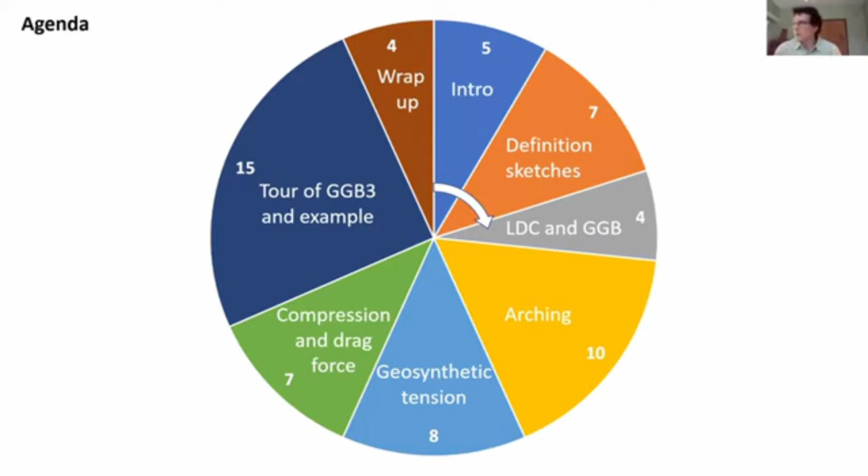Here's a simple sketch showing a typical profile for a column-supported embankment. The embankment is shown in this two-tone color: the separate colors distinguish the more general structural fill from a special layer near the bottom, typically 2 to 4 feet thick. That special layer is known as the load transfer platform, or load transfer mat. It's usually a much more select type of fill, which could be crushed stone or a very good quality sand, and it's within this zone where the geosynthetic reinforcement is located.

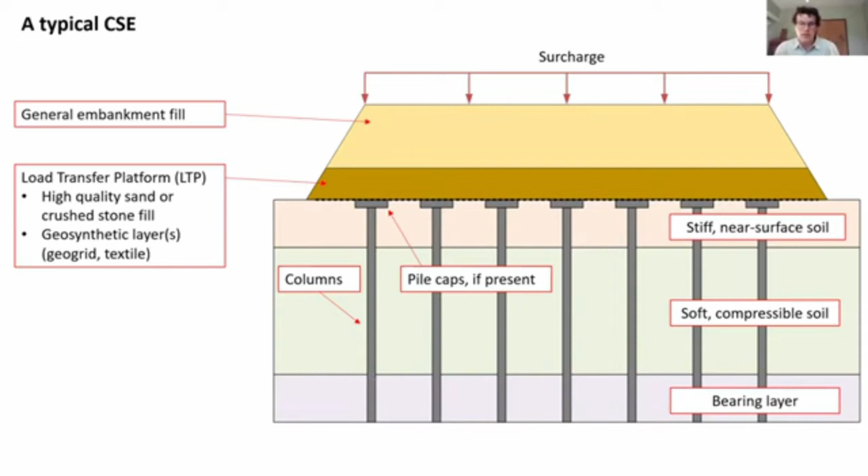I've got one slide here on the construction of column-supported embankments. The columns used are quite flexible in terms of technology. We could use driven piles, although increasingly various forms of formed-in-place columns are used. I've got a photo here showing installation of continuous flight auger columns, and a photo showing a bored displacement column tool for installing bored displacement columns. These photos are courtesy of Jim Collin.

I also have a photo here showing construction of pile caps on top of the columns. So if we want to increase the area of support provided to the embankment by the columns, rather than enlarge the entire column, we can place a pile cap. That has been used to good effect on a number of projects in the US.

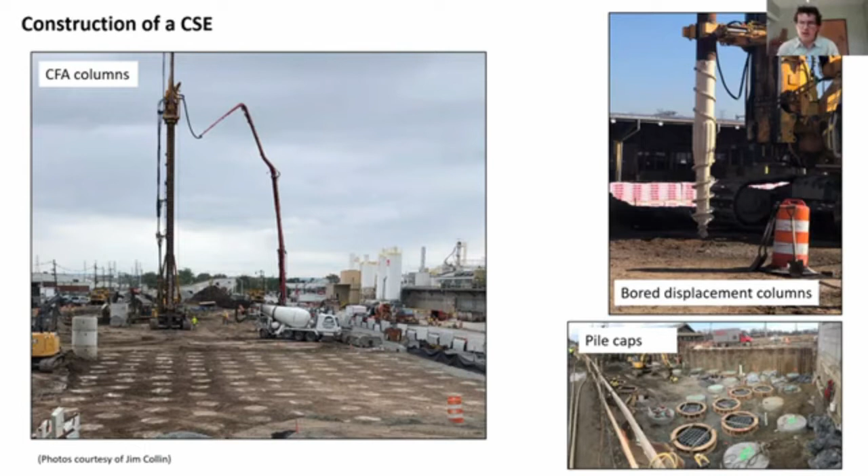We're going to talk a bit today about the various mechanisms of vertical load transfer in column-supported embankments, but just to give you an overview now: we've got arching, soil arching that occurs within the embankment including the LTP. If geosynthetic reinforcement is installed in the LTP, the tension that develops in that reinforcement transfers some vertical load into the columns. Also we have another very significant mechanism of vertical load transfer within the subsoil, due to negative skin friction between the subsoil and the columns as the subsoil settles down relative to the columns, and this mechanism would occur down to the neutral plane.

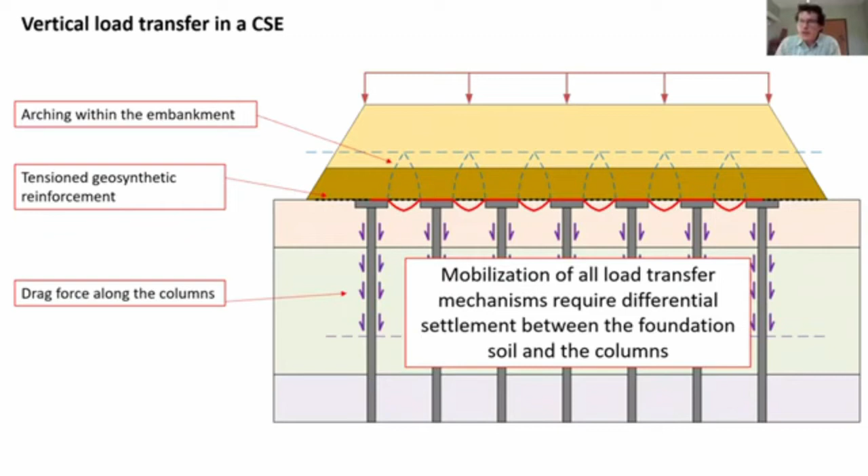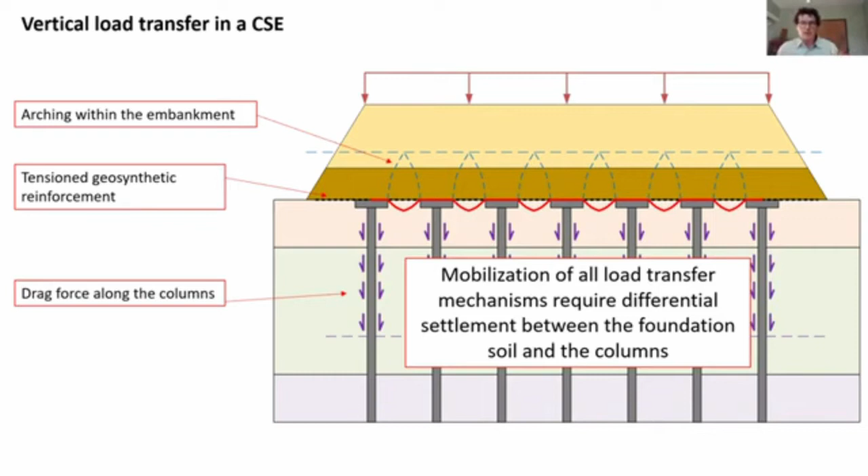It is critical to know that all of these load transfer mechanisms require differential settlement between the tops of the columns and the subsoil between the columns. That's one of the hallmarks of the load displacement compatibility method - we consider that these mechanisms require this differential settlement for mobilization.

All right, here's a definition sketch. We're looking down in plan view, showing different types of arrays we can use for our columns. On the left, you see a square array of columns. In this case, I'm showing round columns, though I could show square columns if we were using driven piles or square pile caps, but I'm choosing to show round columns here.

For our square and rectangular arrays, the key things you want to know are the center-to-center spacings of these columns, S1 and S2. If it's a square array, these are the same; if rectangular, they're different. You also want the dimension of the column or pile cap. From these parameters we can define a unit cell, shown here in this dashed square, which is the tributary volume for any column. In plan view it appears as a square in this particular instance.

I can talk about the same things in terms of a triangular array. Here we again have two potentially different column spacings in different directions, S1 and S2, along with the column diameter or cap diameter. With those parameters, we can define our unit cell.

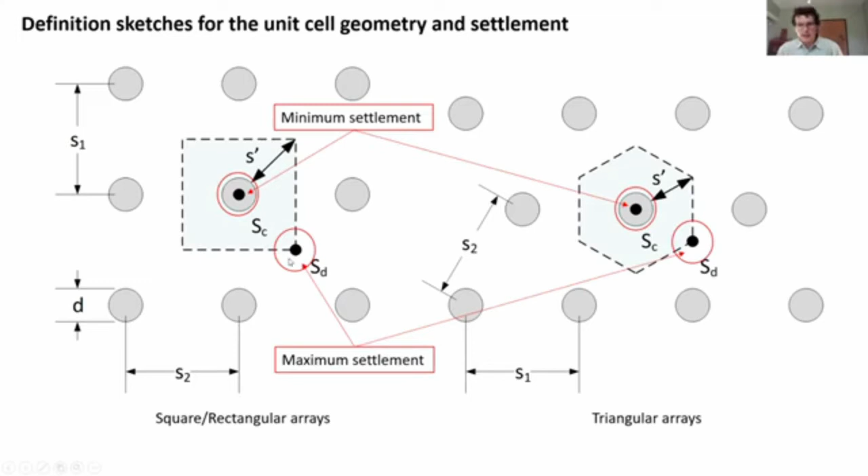Now, what's relevant today is that different locations within the unit cell receive different amounts of vertical support from the columns. If we're looking at locations within the embankment where the column is below us, the settlements in the soil above the column are going to be lower than anywhere else in the unit cell, because those areas receive the most support from the column. Conversely, a location at the edge of the unit cell receives the least support, so it's expected to experience the largest settlement within the unit cell.

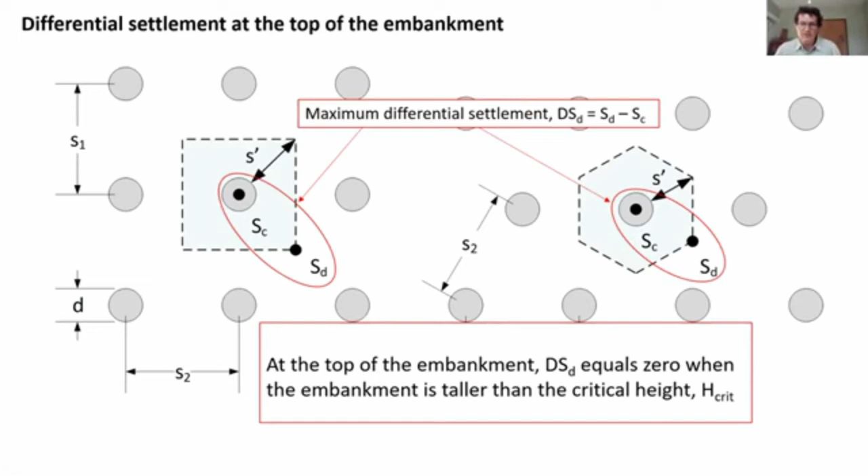So if we're thinking about differential settlement, if we agree the minimum settlement occurs over the column and the maximum occurs away from the column, then we can define our maximum differential settlement. For now, let's think about this differential settlement occurring at the top of the embankment, at the surface. From a design standpoint, for good ride quality, we don't want the surface of our embankment to experience significant differential settlement.

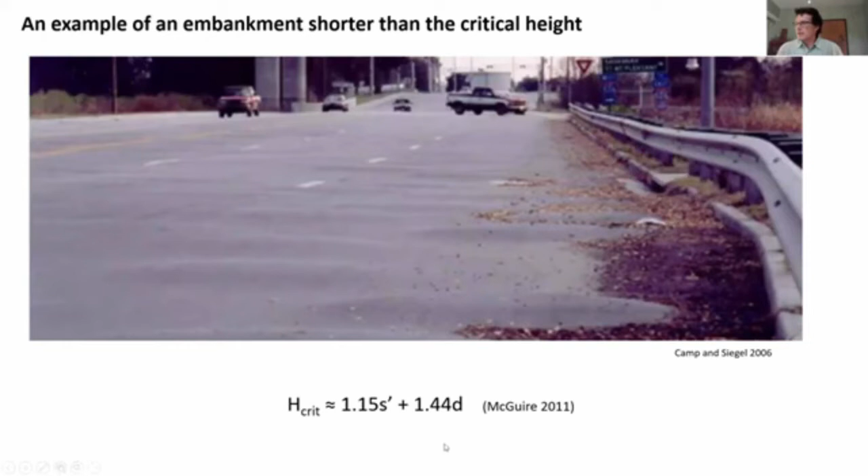This is the differential settlement that we expect and need in order to have these vertical load transfer mechanisms mobilized. It's this maximum differential base settlement which is sort of the anchor in load-displacement compatibility design that ties together all of these load transfer mechanisms. All load transfer mechanisms simultaneously consider this value of DS b,d that is calculated.

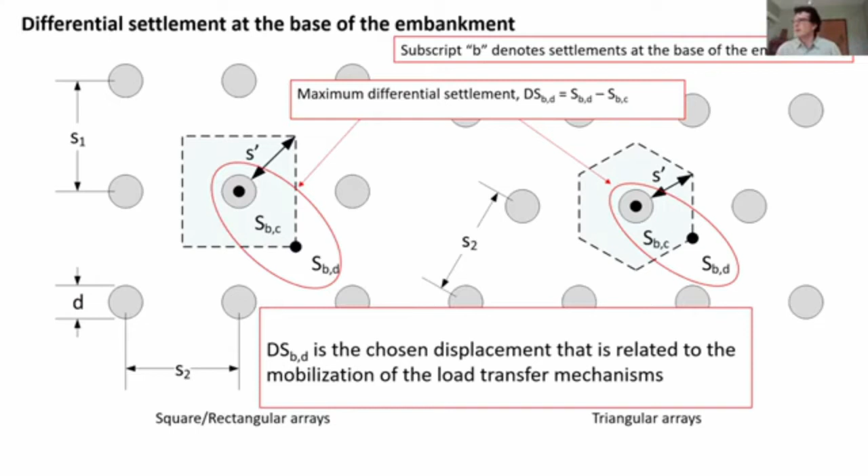Then as we get mobilization of arching due to some differential settlement, that arching transfers some of that stress through shear, given that some of the embankment material is moving relative to other embankment material.

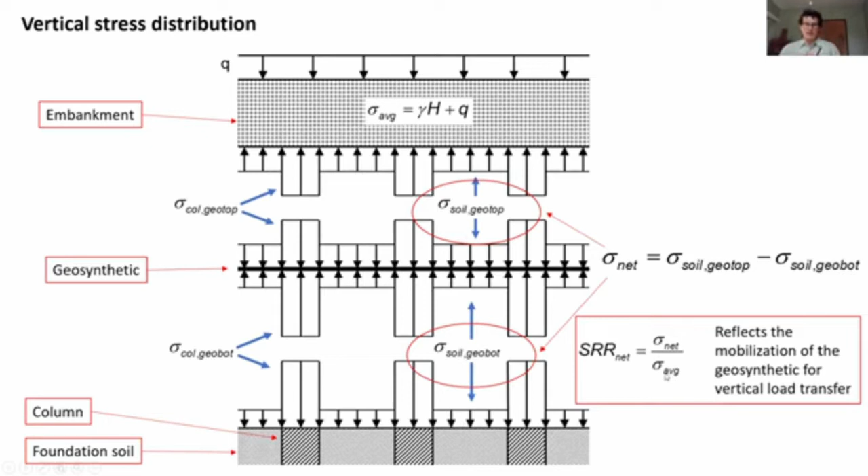That's the kind of basic terminology that we need in order to move forward this afternoon. So column-supported embankment design is fairly complicated, involving lots of design checks.

Among all the design considerations, two that we're going to talk about today are making sure that we have acceptable total and differential surface settlements. We usually want to try to minimize the surface differential settlements as much as practically possible. We also want to make sure that the strain and tension we expect in the reinforcement is acceptable over the service life of the embankment.

There are several ways we can go about answering these questions, and the earliest design guidance goes back to European practice with column-supported embankments - these so-called two-step analytical procedures. There's a number of them out there in the literature.

What's relevant now is that these two-step procedures, by their name, decouple the analysis of what kind of load transfer we expect to get out of arching and the load transfer we expect to get out of the geosynthetic reinforcement. Often these methods do not satisfy vertical equilibrium, and do not consider stress-strain compatibility in the reinforcement, meaning the tension in the reinforcement is not related to the strain in the reinforcement by some value of tensile stiffness.

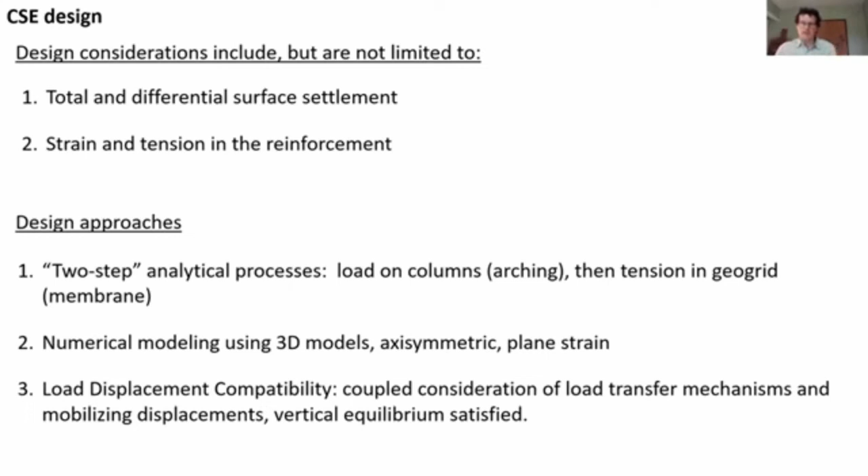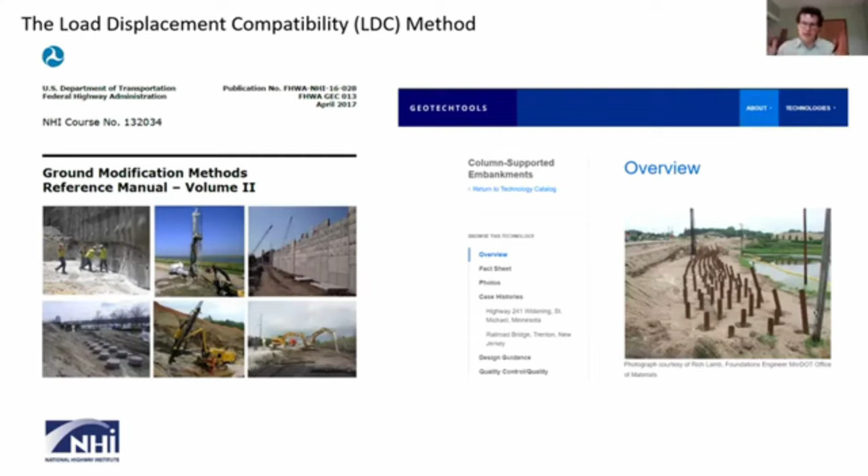The details of load displacement compatibility are captured in several journal and conference publications, but the easiest way to get access to the details of the methods are in GEC 13, volume 2, chapter 6, where you'd find information on LDC, as well as GeotechTools, which I hope you're all familiar with. This is a website accessible through the Geo Institute webpage, at no cost. You just create a login, jump in there, and you can find information on all sorts of ground improvement technologies. The list is expanding all the time, and there's a nice section about column-supported embankments in there.

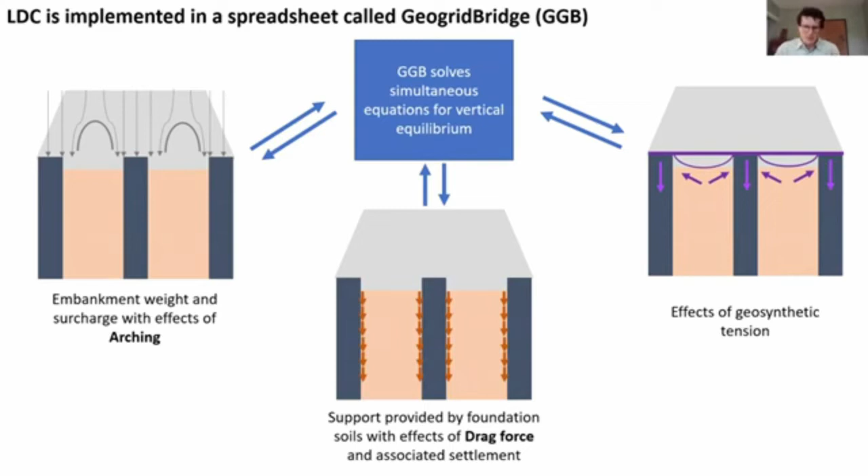As I've already said, we need a tool to be able to simultaneously solve these equations of equilibrium. GeogridBridge, or shorthand GGB, is the tool to do this.

There's a bit of history with this spreadsheet. The original version goes back to the early to mid 2000s, led by Dr. George Filz and Miriam Smith. They were working with the Virginia Transportation Research Council and produced a manual back in 2006. The first version of that spreadsheet soon followed.

It wasn't until 2014 that Colonel Joel Sloan, a PhD student at the time at Virginia Tech, led an effort to update this spreadsheet with additional features. This current effort, GGB3, is the first full clean-sheet redesign of this design tool. Because we were starting with a clean sheet, we were able to really pick what capabilities we wanted to offer users and try to make the spreadsheet as modern as it can be.

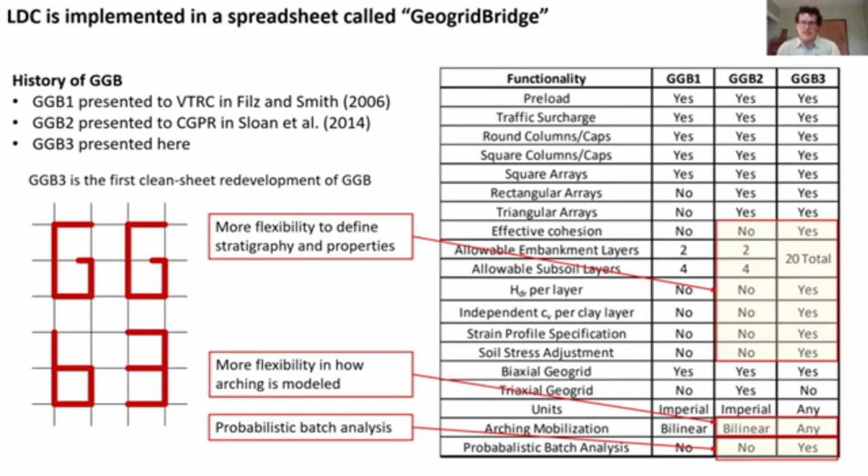And as Elise will go through, we've added a really nice ability to perform batch analyses with the new spreadsheet. You can use those in a probabilistic framework to calculate, to estimate the probability that the settlement may exceed some acceptable value.

At this point, I'm going to just do a slight deeper dive into each of these mechanisms of vertical load transfer. The first one I'm going to talk about is arching.

I'm going to be focusing on what is done within LDC. Within LDC, the arching is considered using a version of Terzaghi's arching theory that was presented for two-dimensional situations back in the 1940s.

This might be a situation where we've got a plane strain, or approximately plane strain, model where we've got a trap door, say in the middle. If we have a soil tank and this trap door drops down, the soil not over the trap door is considered to remain stationary, while the soil over the trapdoor is assumed to move down uniformly. We're going to get load transfer through shear as that moving soil moves relative to the stationary soil.

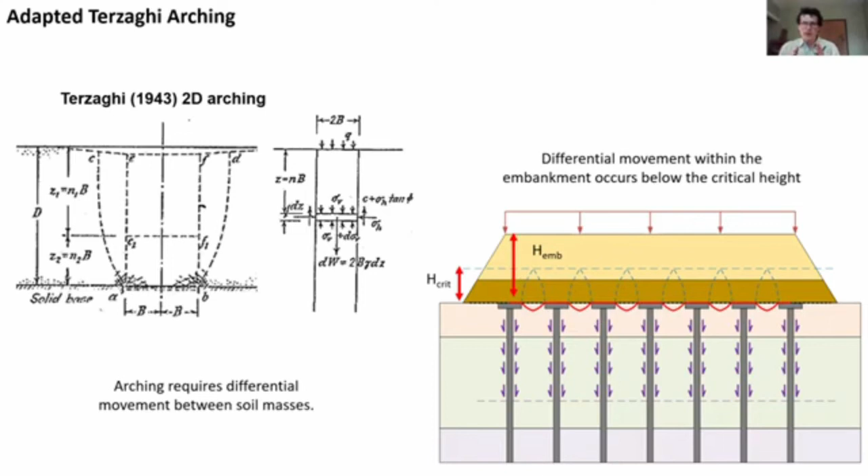This is a fairly well-established concept in soil mechanics. What I'm going to be talking about today is how people over the years have adapted this for the three-dimensional unit cell. We're going to get arching in the embankment below the critical height, because it's below the critical height where we have differential soil movement within the embankment, and that differential movement is essential for this shear transfer.

I've got this graphic here to show this three-dimensional unit cell. In this case, I'm showing square columns. The dark brown is the subsoil. This lighter brown is the embankment, shown as one color for simplicity here. Again, our assumption for this model is that this soil overlying the column does not move, and the soil between the columns moves down uniformly. For convenience, we're going to define our unit cell centered on the middle of the soil rather than centered over the column. So it's the same unit cell, the same area, we're just shifting where it is centered.

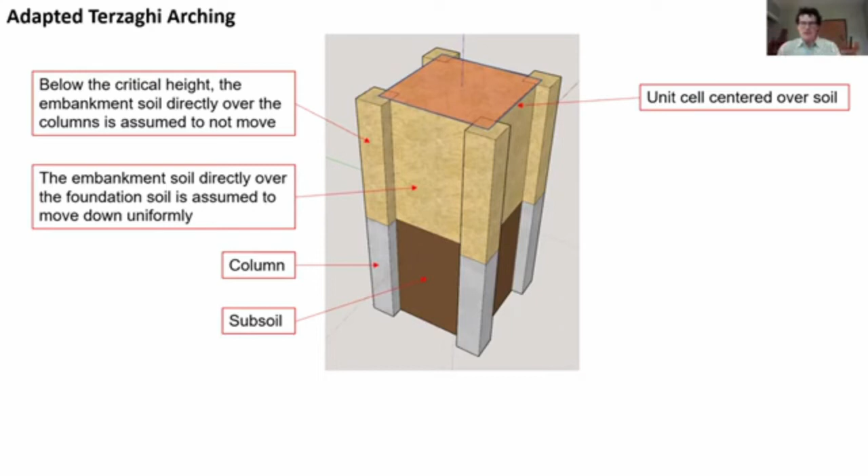With this little sketch, let's define a little vertical increment within this embankment height here. This little increment has a thickness dz. As this little increment moves down relative to the soil that is assumed to remain stationary, the horizontal stress between these soil masses is going to develop shear stresses in the movement. It's those shear stresses that are going to transfer load from the moving soil to the stationary soil, and then ultimately to the columns. So to model this, or to represent this mathematically, we want to look at how the vertical effective stress in this increment changes over this incremental thickness.

The self-weight of that increment is influenced by the effective unit weight of the increment, which causes the vertical effective stress over that incremental thickness to go up. Whereas the shear stress that develops between the portion of the increment that moves down and the portion that stays fixed acts to decrease the vertical effective stress.

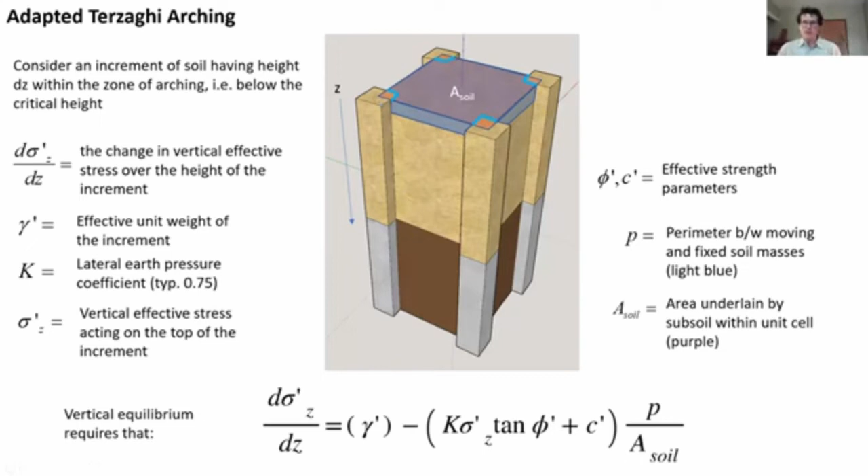This is the understanding for a single increment, and you can imagine we'd have a whole bunch of these increments going down, and we can look at how the vertical stress changes as we go down through the embankment.

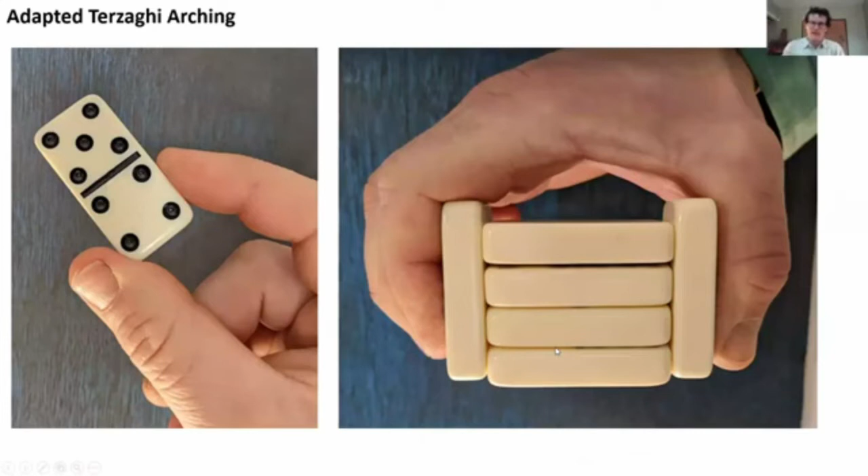One simple way of getting this concept in your mind - I found some dominoes in my house, and I took 2 dominoes and put them between my hand, and I was able to suspend 4 dominoes above the ground just by the interface shear between the fixed dominoes and these dominoes that, in the absence of that shear resistance, would fall to the ground. So again, it's a similar problem, but something tangible here.

This adapted Terzaghi procedure is implemented in all versions of GeoGrid Bridge. The first 2 versions use integrated forms of that differential equation, whereas the 3rd version uses that incremental form. By discretizing the entire embankment into these little increments, we can provide more flexibility in defining more complex stratigraphy within the embankment.

Provided that you're using a thin enough value of dz, and usually a value of 0.1 feet or thinner is sufficient, the answer you get out of the incremental form is going to match what you would get out of an integrated form.

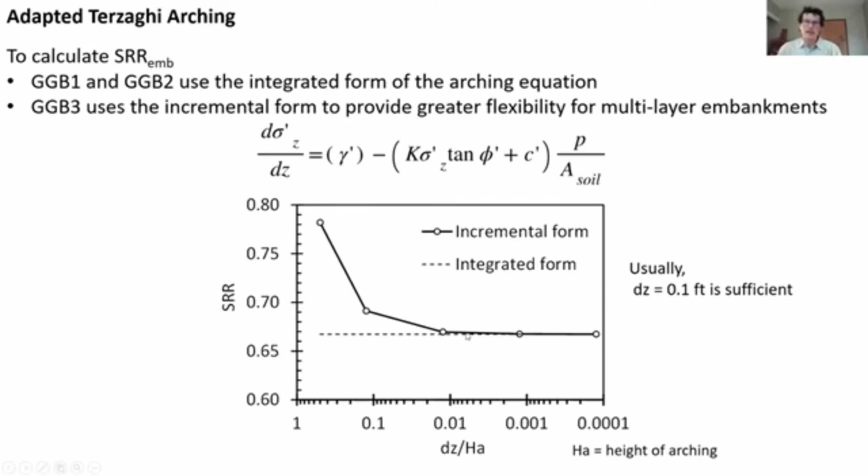Thinking about how this arching is mobilized - the arching is mobilized because we have this differential settlement at the base. I've already introduced this concept of the stress reduction ratio, where if we have no load transfer, that value is 1. And if we had all of the new embankment load transferred to the columns, that stress reduction ratio would reach its other limiting value of 0.

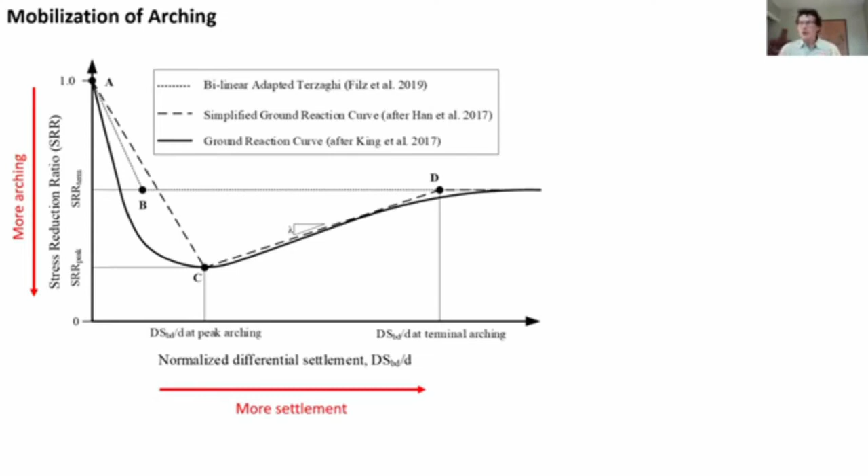There's lots in the literature about how this arching might be mobilized with more differential settlement. The first form I'm going to talk about is what's known as the bilinear adapted Terzaghi. This is what has been used in GeoGrid Bridge up to date, and it is, as the name implies, a bilinear relationship with a linear ramp up from no arching to a full state of arching according to adapted Terzaghi theory, then holding at that fully mobilized state thereafter.

This slope of the portion where we're ramping up and mobilizing arching is estimated using simple elastic theory. For most conditions, we're looking at a differential settlement at the base that's about 0.5 to 2% of the column or cap diameter.

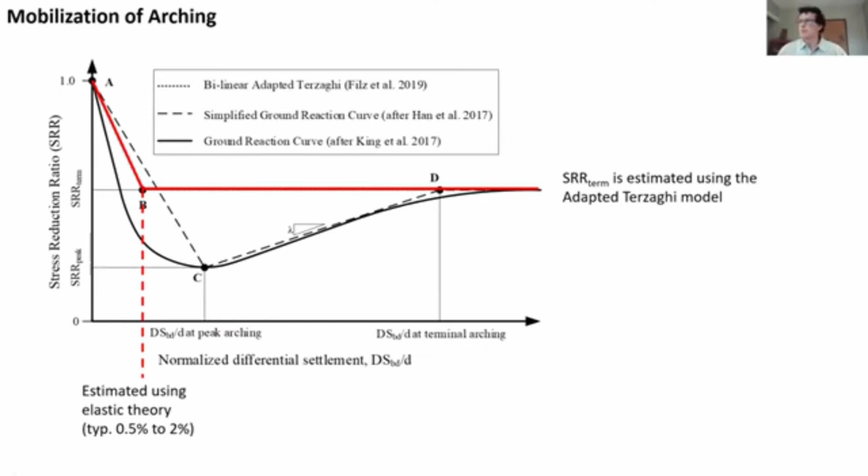Another way we can look at the mobilization of arching - and I should back up and say that all of these three models shown on this sketch can be implemented in the new version of GeoGrid Bridge 3.

The black line that's not highlighted right now, the solid line, that's the ground reaction curve that has been proposed by Daniel King and his co-authors. This curve in its full form requires defining several points in this relationship between stress reduction ratio and differential settlement. More recently, Dr. Jie Han at the University of Kansas has proposed this simplified ground reaction curve, which requires definition of fewer points along this relationship. I'm highlighting that now because it's a little easier to talk about.

It's also the subject of a paper that I'll be presenting at Geo Congress in Charlotte this spring. In this instance, we're looking at mobilization of arching to a peak arching condition, which is estimated using application of other arching theories, such as the concentric arching model proposed by Suzanne Van Eekelen and others, as well as the Hewlett and Randolph method, which goes way back to the beginnings of column-supported embankments.

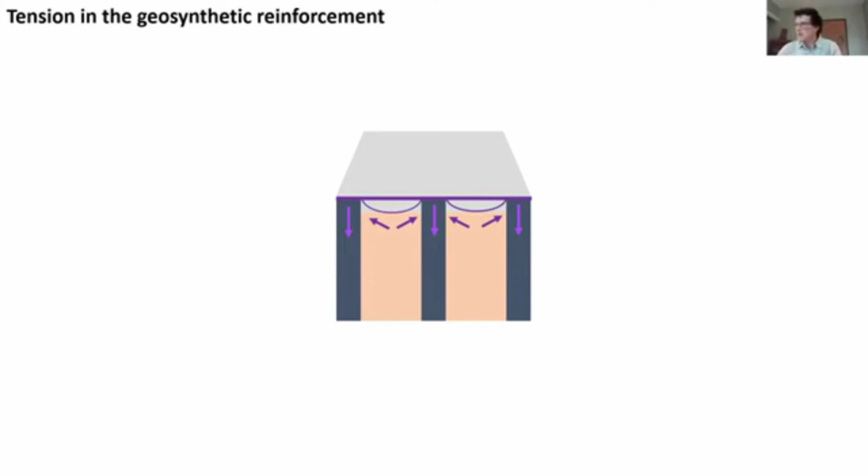All right, second load transfer mechanism that we want to focus on today is the development of tension in the reinforcement. And so I hope that all of you have had a chance to jump on a trampoline at some point in your life.

And if you can think back to that experience and you're standing on the trampoline, you're suspended above the ground because of the tension that develops in that membrane, in that trampoline membrane. And it's the vertical component of that tension which is satisfying vertical equilibrium.

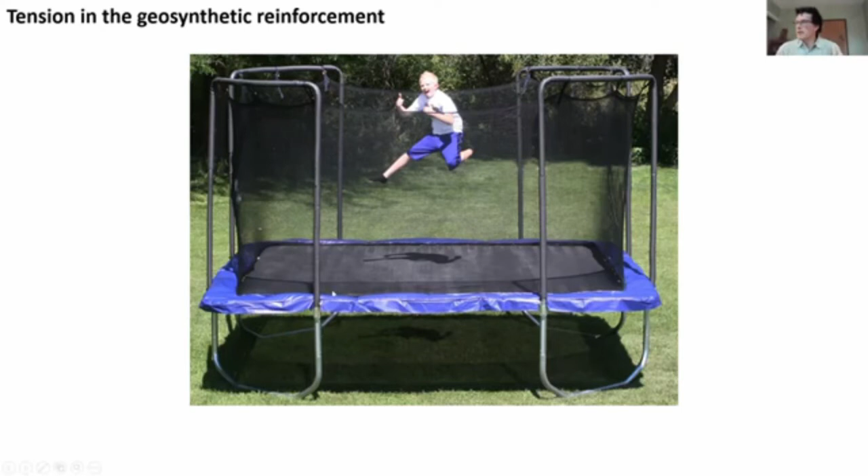So rather than looking at the frame of our trampoline, we've got columns as our frame and geosynthetic reinforcement as our trampoline. And rather than this kid, what's acting down on our reinforcement is the stress acting over the soil above the reinforcement that I defined earlier.

All right, so again, I'm showing this with square and rectangular arrays, as well as a triangular array. This time I have square columns or caps shown, and it's appropriate this time to highlight that we can convert between round shapes and equivalent square shapes using an equal area relationship between those dimensions.

And it's necessary to use a square column or cap shape when applying this analytical model, because the span distance between columns is important in the model, and that span distance is fixed for a square shape where it wouldn't be fixed for a round shape, because of the circumference.

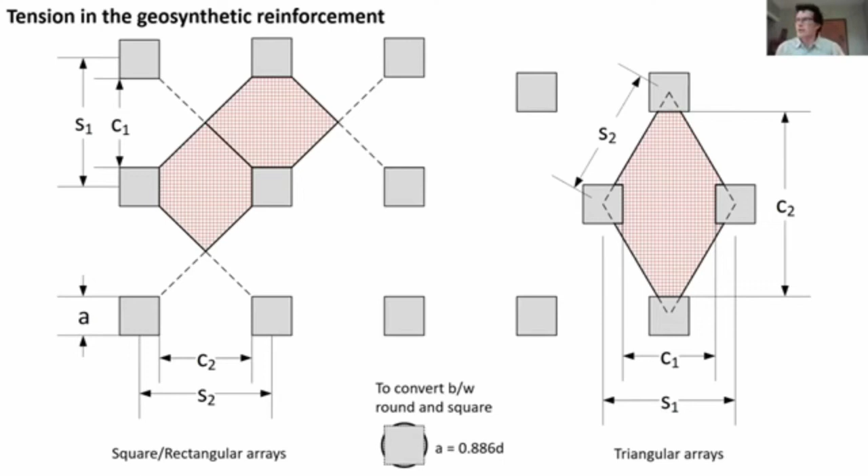All right, so as we move forward here, we need to recognize that it's the reinforcement across each of these spans which is collecting the vertical load carried by the reinforcement within the tributary area for each span.

So focusing on this left-hand figure, this C1 span and this C2 span are the same because I've drawn these as a square arrangement. If this were a rectangular arrangement, these spans would be different because the spacing S2 would be different.

For a triangular array, we also have two spans that ultimately transfer vertical load to the columns. That's C1 across this S1 center-to-center spacing, and C2, which requires using both S2 and S1 to determine. And it's within these strips where the strain and tension in the reinforcement will be highest.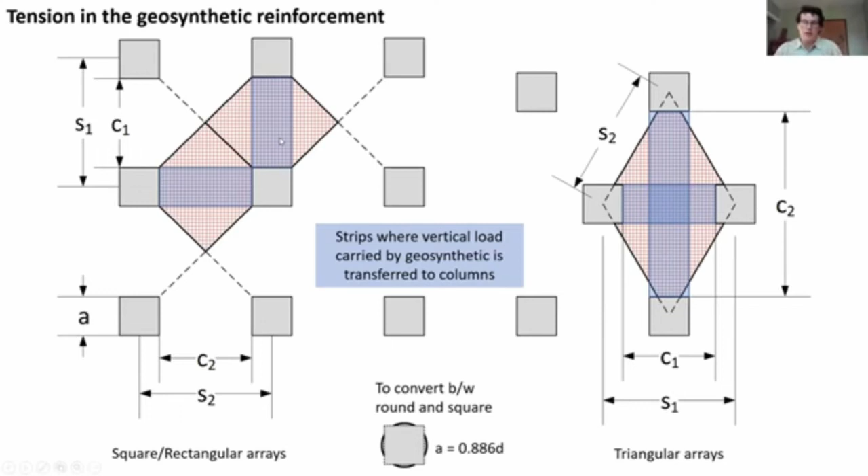Okay, so as we go through this, we're going to be using what's known as the parabolic method to evaluate the tension and strain produced in the reinforcement due to this net vertical stress carried by the reinforcement.

And so the total load carried by the reinforcement is going to be equal to this net vertical stress multiplied over the area on which that stress acts, which is the portion of the unit cell that's not supported directly by the columns.

And that total amount of load is going to be distributed between the C1 span and the C2 span. So one of the questions as we go through this model is how that load is distributed between these two spans. For triangular arrays, we use the fact that these spans cross at the center point here.

So we know that the maximum sag of that reinforcement due to that load is going to be, those maximum sags are going to be the same. So we use that as sort of our anchor point in figuring out the load distribution between these two spans.

We assume that the shape of this deformed reinforcement can be described by a parabola, and that allows us to decouple any tension that develops in that reinforcement into its vertical and horizontal components. And it's that vertical component which again is doing the vertical load transfer.

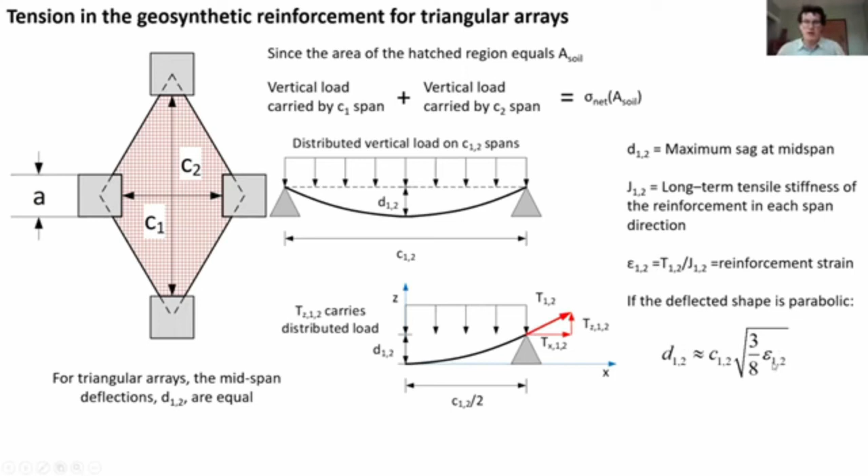All right, so armed with that information, applying a little bit of algebra, we get a nice closed-form relationship between this maximum differential base settlement and the net vertical stress carried by this reinforcement and transferred to the columns.

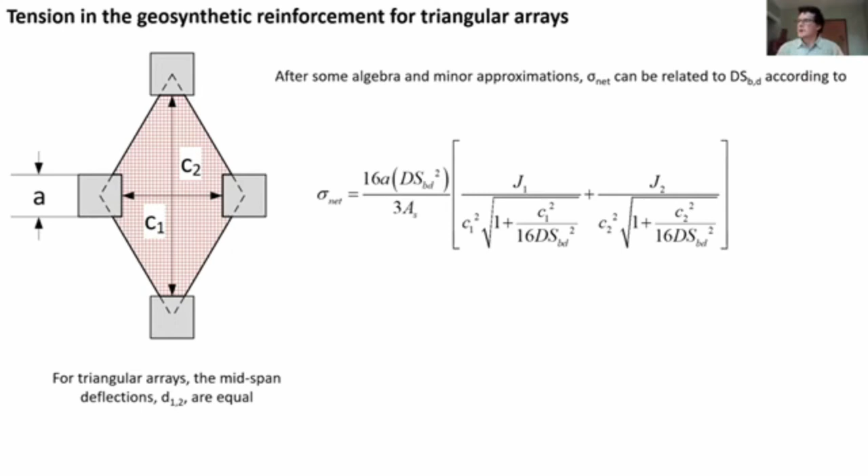All right, similar thing for square and rectangular column arrangements. Now in this case, our spans don't cross at a common midpoint, so our maximum sags aren't required to be the same. To get a closed form solution, we make an assumption that the total vertical load is distributed across these spans according to the percentage of the tributary area relative to the overall area and the unit cell that's not directly supported by the columns.

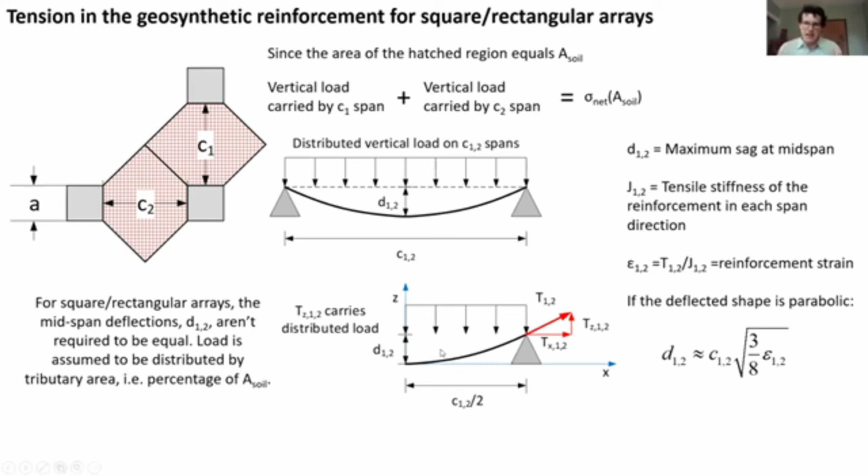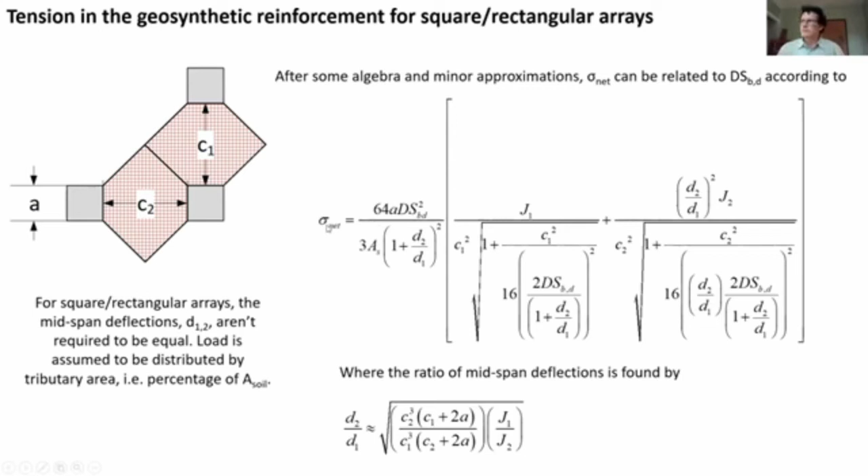Once we make that assumption, the rest of the concept is exactly the same as for the triangular arrangement. And we end up with this lovely closed form equation that relates the maximum differential settlement at the base to the net vertical stress carried by the reinforcement. All right, so that's the parabolic method for evaluating the tension and strain in the reinforcement.

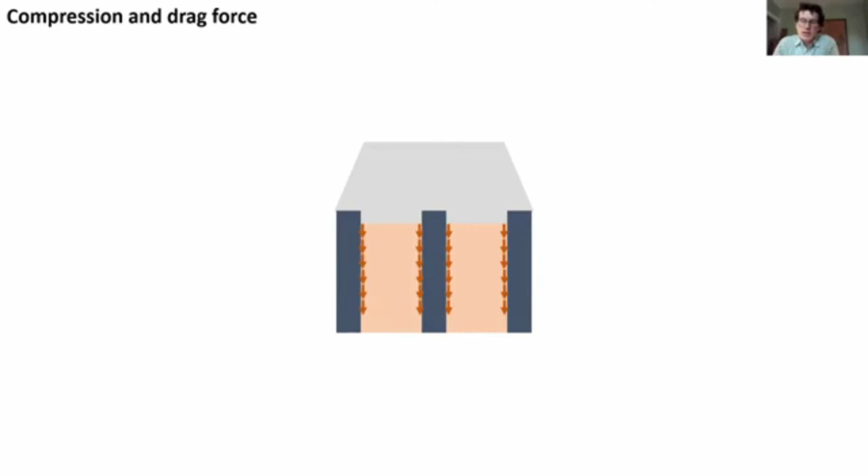All right, last load transfer mechanism. This is, we're going to both look at the compression of the subsoil and the load transfer due to negative skin friction or drag force.

Within the embankment, load displacement compatibility assumes that these embankment materials are adequately compacted such that the compression of the embankment material itself is insignificant. That said, the fact that there's differential settlement between the columns, this moves down, there's going to be a compliant settlement at the surface of the embankment due to that differential base settlement.

Now, if we're above the critical height, that settlement at the embankment surface is going to be uniform. And so within LDC, we use the model by Russell et al. from 2003 to estimate what that uniform surface settlement is relative to the column top for some value of maximum differential base settlement. In this equation, lowercase a sub s is the area replacement ratio, which is the percentage of the unit cell area that is occupied by a column or pile cap.

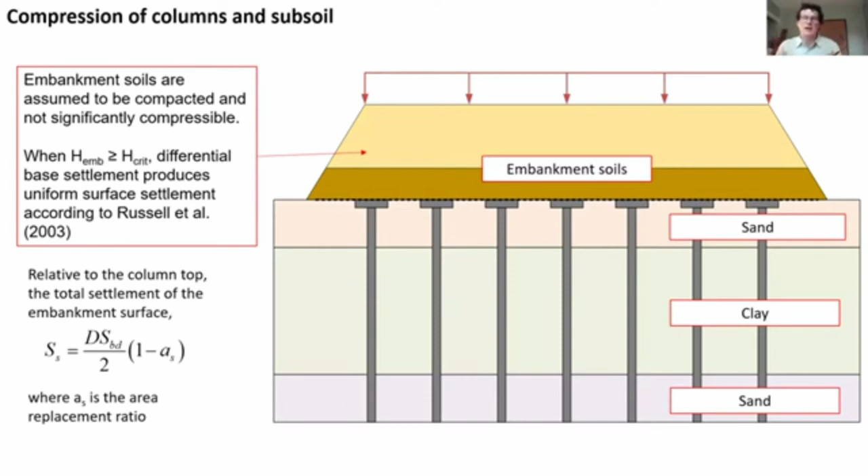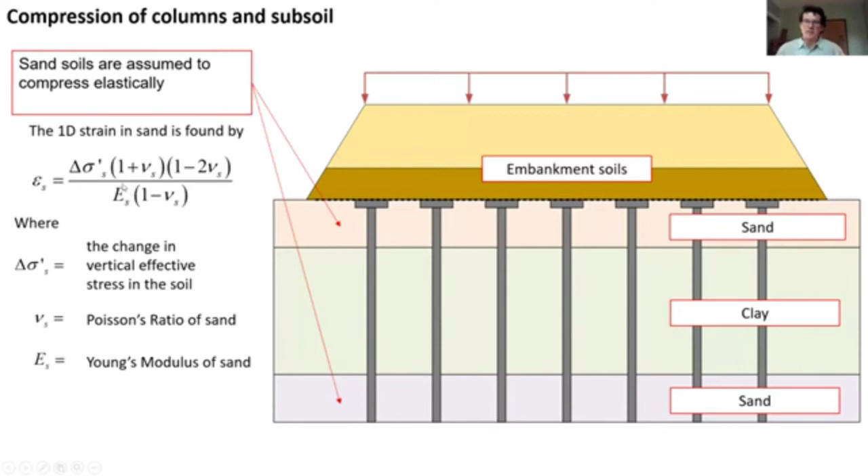All right. Now focusing on sand soil. Within GeoGrid Bridge 3, soils are defined either as sands or clays. So if you define a soil as being a sand, compression will be handled using an elastic, simple one-dimensional elastic model, where the strain in that sand is a function of the change in vertical effective stress felt, the Young's modulus specified for that material, as well as its Poisson's ratio.

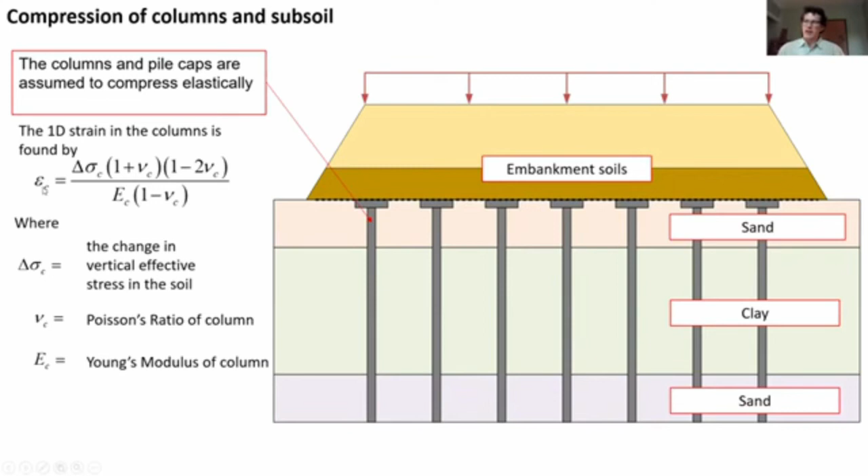A similar model is used for the columns. We assume that the columns are also compressing elastically. Most often we'll have a different and higher value of Young's modulus for the column material, as well as a different Poisson's ratio. And we can calculate the strain in the column due to some change in the vertical stress in the column.

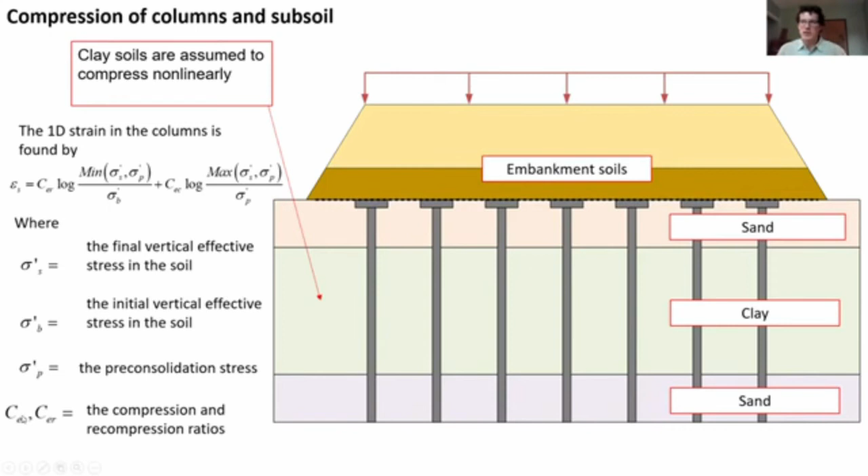All right. The compression of the clay soils is handled using the most complex analytical model, but it's one that we're all familiar with. When we do one-dimensional consolidation calculations, we use a nonlinear equation to get the one-dimensional vertical strain in that clay due to changes in stress. So GGB3 uses a traditional one-dimensional strain equation, just like we use in consolidation analyses. And so that means we can define pre-consolidation stress, define the compression and recompression ratios, and handle things in the usual way.

All right. Within GGB3, we can do time rate of consolidation calculations, using the method by Janbu from 1965, which is an adaptation of Terzaghi's time rate of consolidation theory to account for the fact that our ultimate strains are often not uniform. Particularly in this case, where we have negative skin friction, our strain distribution in the clay is expected to be non-uniform, and this Janbu method provides a simple way of handling that. Other than that, you're defining user parameters you should be comfortable with: the maximum vertical drainage path length, and the coefficient of consolidation due to vertical drainage.

Now, GGB3 does the settlement calculation down to the neutral plane within the profile. So if you as the user are interested in the total settlement, not relative to the column top but absolute, then you also want to calculate the settlement below the neutral plane. This analysis is done external to the spreadsheet, but there are well-established methods you can refer to, for example the driven pile manual, which describes the equivalent footing approach to estimating settlement.

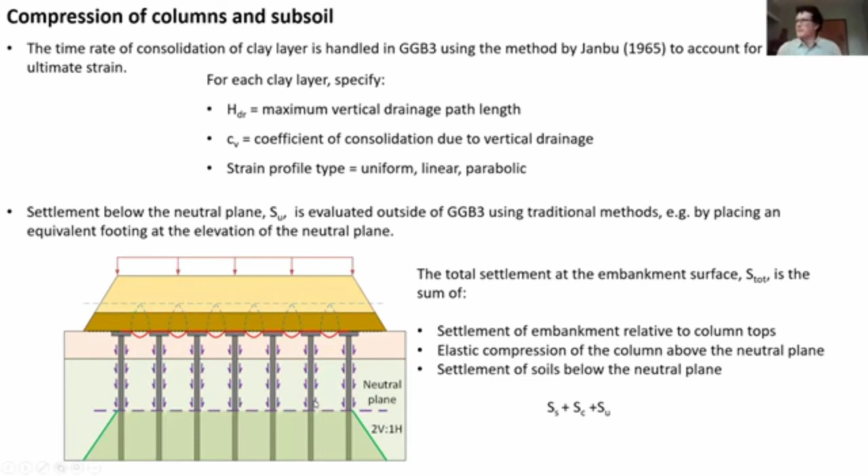All right, and the discussion about drag force is really simple at this point because we've already talked about it with the adapted Terzaghi procedure. The mechanics are the same, where the differential equation is the same.

In this case, we're looking at differential movement between the columns and the subsoil. And this value of K also accounts for any installation effects of the columns. So if we're using driven piles versus, say, a continuous flight auger pile column, then this value of K might be considered differently. So I would encourage you to just use a static capacity analysis method that you're comfortable with to evaluate K for use in this model.

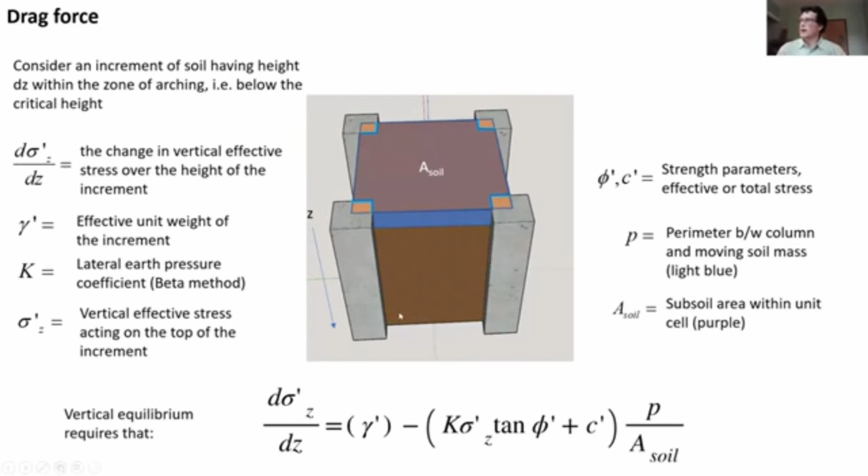All right, and there's our unit cell defined just in the same way as before. All right, so at this point, I'm going to turn things over to Elise, who's going to give you a tour of the spreadsheet in the context of an example.

All right, thank you, Professor McGuire. I'm going to give a brief example that's going to show you how GeogridBridge 3 works and also sort of the user experience associated with it.

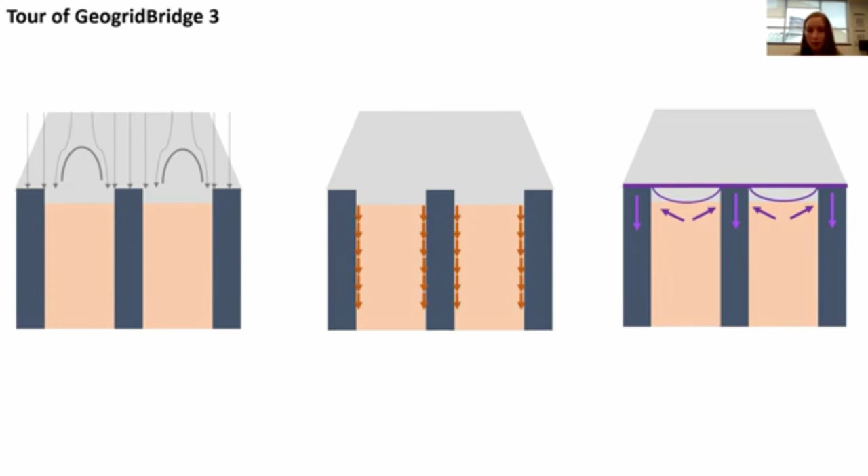So this is the example that I'm going to be taking you all through. It's a pretty simple embankment that's being supported by CFA piles. The embankment itself is 15 feet tall, is underlain by a 5-foot sand layer and a 35-foot clay layer. We're going to assume that the geosynthetic strain is limited to 5%, and both the total and the post-construction settlement at the top of the embankment is limited to 3 inches or 1/4 foot.

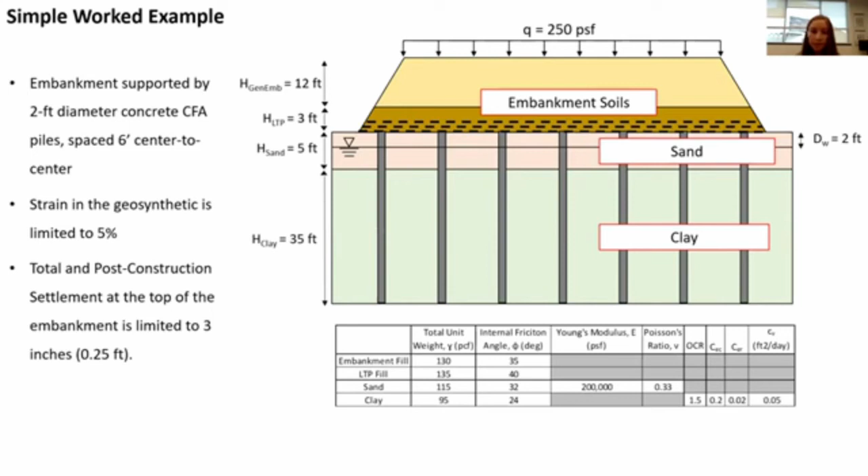So when you open the spreadsheet, this is basically the landing page that you will see. And we're actually going to go ahead and open up the spreadsheet just so that you can see that in real time. And then we'll go ahead and go through the example on PowerPoint just for simplicity.

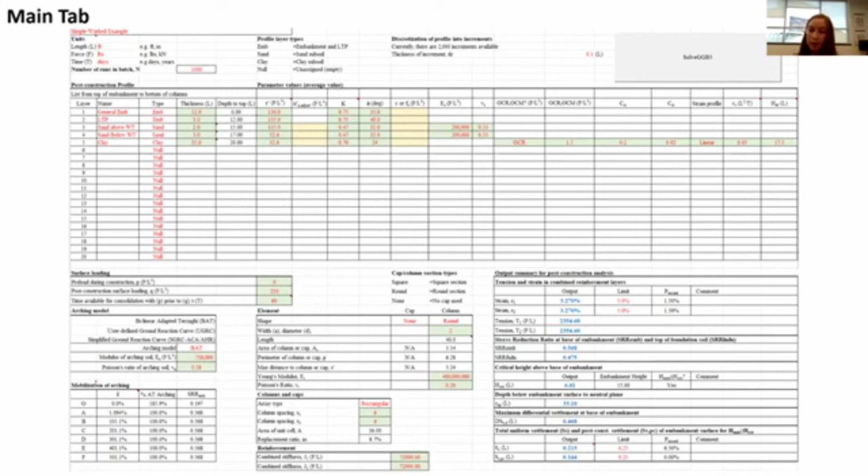So when you open up the spreadsheet, this is what you'll see. You might have noticed that you have to enable the macros, otherwise the spreadsheet won't work. Top left corner where you see the word 'simple worked example' is where you're going to put in your most basic inputs. You're going to name the project, you're going to define your units, and it's really important to note that the units that you define have to be consistent throughout the entire spreadsheet.

So you can use whatever unit system that you would like, but if you define feet, any length that you use throughout the entire setup has to be in feet, it can't be in inches or anything like that.

Directly below those units is where you input the number of trials if you wish to run a batch analysis. We recommend using 1,000 trials. That's kind of the industry standard for a lot of other technologies that use a Monte Carlo simulation, but GeogridBridge 3 has the capability of running up to 10,000 trials. If you just wish to use a deterministic analysis and not consider probability, you would input 1 into n, and that is actually the default value.

Right below that is where you will define your post-construction profile. You'll give a name to each embankment layer, and you will define the type of layer that it is. The options are an embankment layer, a sand layer, and a clay layer. And if there are no layers that you wish to input, it'll be null.

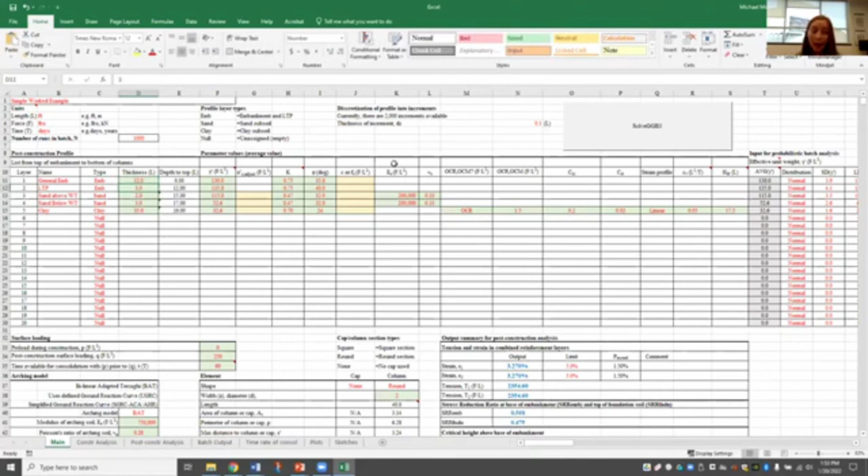You'll notice that a lot of the cells have different colors and different text colors. Red text indicates that it is a user input. Black text indicates that it's something automatically generated by the spreadsheet. As well, the highlight color of the cell is important. If it's green, that means the input you put in as the user is acceptable. If it's yellow, it means you can put an input in, but you don't have to. And if it's red, that either means a value is required and the cell is blank, or the value you put in is nonsensical and needs to be changed.

So that makes it pretty easy to see exactly what you need to input as the user and what sorts of parameters are necessary for each type of soil layer. So you go ahead and for each layer define the thickness and each of the parameter values that you wish to use for that layer.

And then after you do all that, you'll go ahead and define your surface loading conditions. That's pretty much all pre-prescribed, so it's pretty simple to do, but it allows you to input a preload for during construction, the surface loading that you expect post-construction, as well as the time available in between when you construct the embankment and when it is actually put into use and paved.

You can also define the arching model. We talked about the different methods of arching that are capable in GeoGrid Bridge 3. Right now it's set to the bilinear adapted Terzaghi method, and you'll also have to put in the relative soil parameters for the arching method that you select.

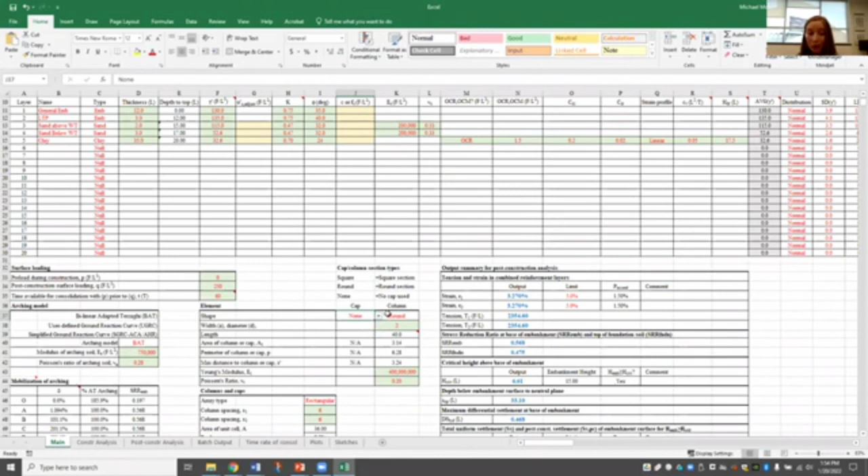Directly to the right of that is where you'll input the column geometry. You'll input the shape and the size of the caps and the columns, and you'll also define the array type. If you scroll down just below where you'll input the array information, you'll find where you'll put in information regarding the stiffness of the geosynthetic reinforcement.

Those are all of the inputs that are required for you to run a deterministic analysis of GeoGrid Bridge 3. After you do that, you'll scroll up to the top of the spreadsheet and press the Solve GeoGrid Bridge 3 button. After you do that, it'll spit out those blue numbers that you see in the output section. Blue indicates that it is a result from the GeoGrid Bridge 3 analysis.

And if you choose to run a batch analysis, you will also see a probability of exceedance for the limits that the user defines for the spreadsheet. So that's pretty much what the spreadsheet looks like.

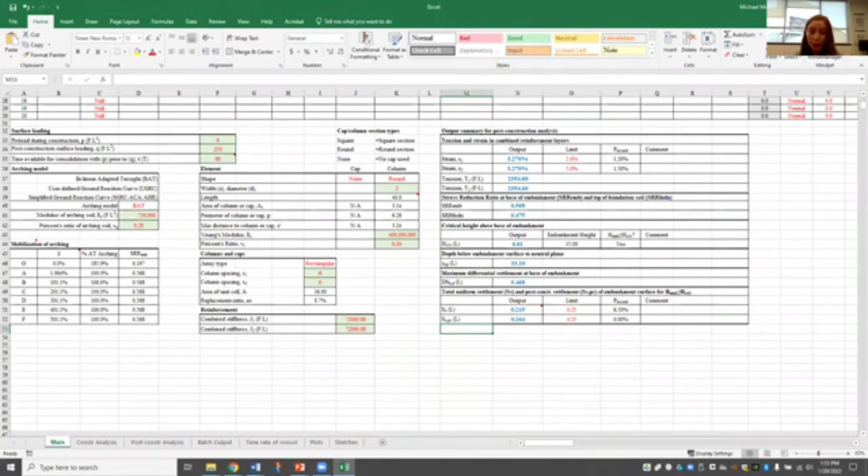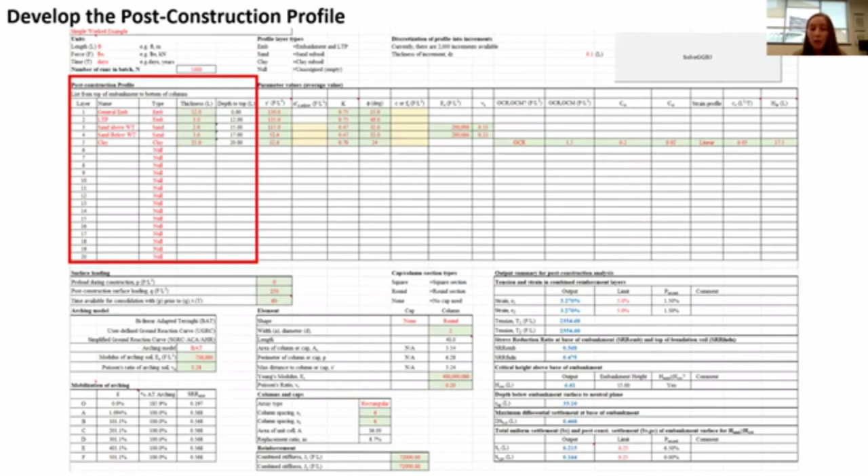We're going to go back into PowerPoint at this point and walk you through an example. Again, this is the color scheme, but the first thing that you'll do is you'll develop the post-construction profile, and that's located again in this corner. For this example, we have the 15-foot embankment.

We'll separate that into the general embankment layer and the load transfer platform and define the thicknesses for those. An important note is that if a layer is bisected by a water table, you need to separate it into the layer above and below the water table. You'll see that we did that for the sand layer here.

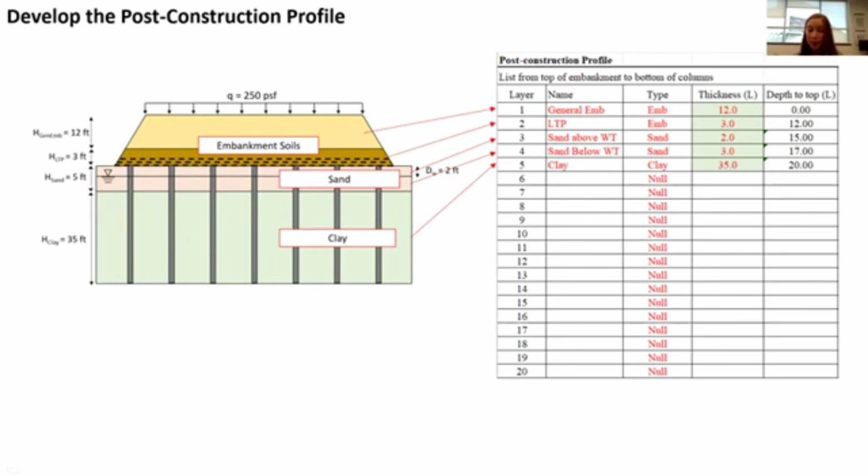And then lastly, we'll input the clay layer. If that's the last layer, you don't need to put in anything else. Next, we'll put in the material properties for each layer. We'll go layer by layer for this in the example.

So for the general embankment, anything that is an embankment layer only requires a unit weight, an earth pressure coefficient, and the friction angle. We'll go ahead and use those values and put them directly into the spreadsheet. Again, it lights up if you need to put something there, so it's very simple for the user to know where they need to put different parameter values.

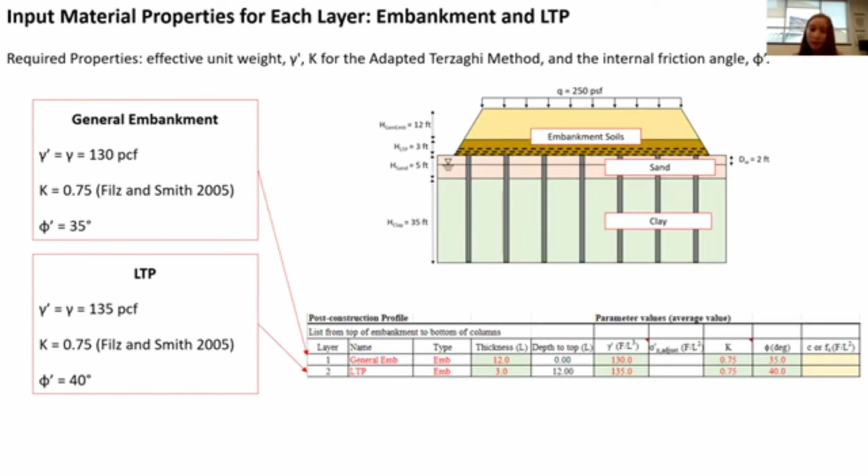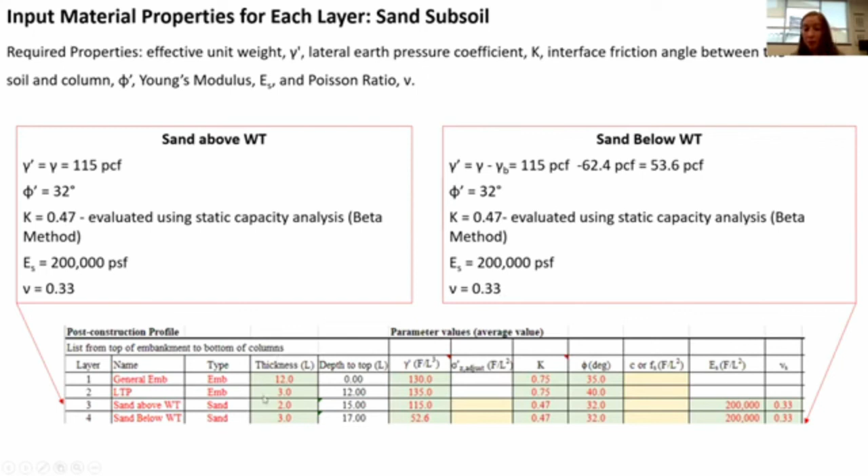Same goes for the sand subsoil. Again, we need to break it up into the sand above and below the water table. There are a few extra parameters that are required, including the Young's modulus and the Poisson's ratio. Again, you will calculate the earth pressure coefficient using a static capacity analysis. We use the beta method in this example, and you'll go ahead and put those inputs in where they are required.

Lastly, you'll do the same thing for the clay subsoil. Clays are going to require the most parameter inputs, but a lot of them are similar to the sand and embankment layers as well. Main differences are that you need an OCR as well as a compression ratio and a recompression ratio for the clay layer.

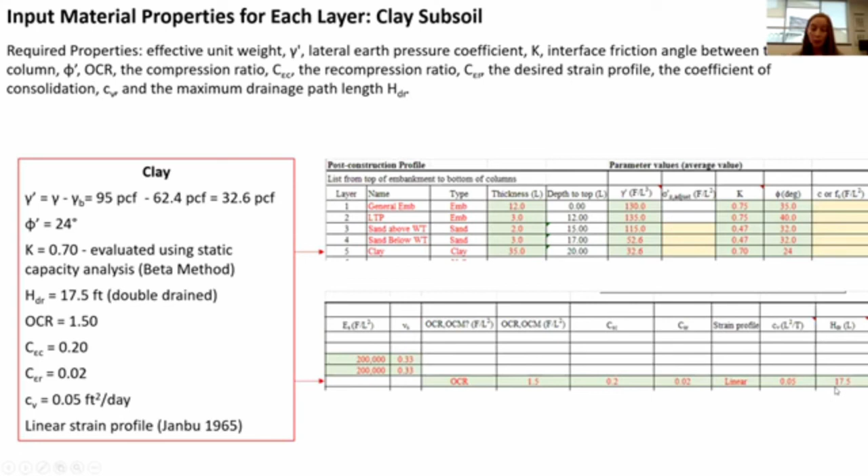You'll also need to define the strain profile. We chose a linear profile in this example, and also the maximum drainage path. Because we are assuming that this example is doubly drained, the maximum drainage path is going to be the total width or total depth of the layer divided by 2.

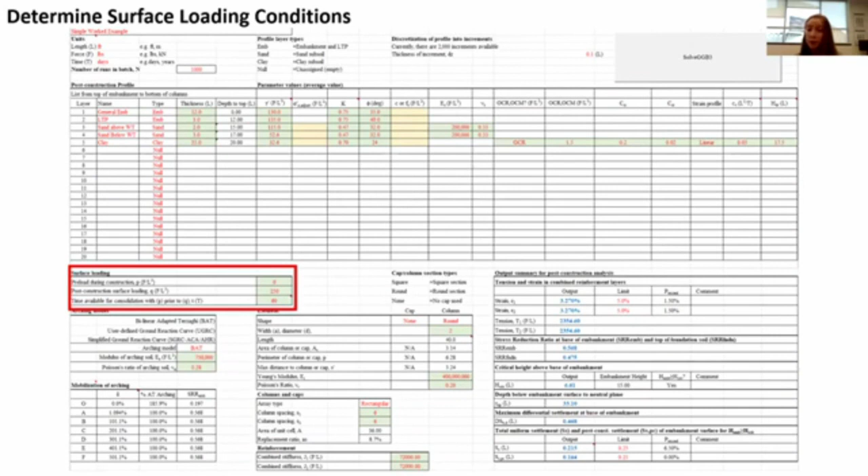After you input all of those parameter values, you'll go ahead and define your loading conditions. For this example, there is no preload that was prescribed, so we'll just enter 0 for that value. 250 is the traffic load that we are expecting, and there will be 60 days available for consolidation before paving and traffic load is applied. We'll just go ahead and enter those values directly into the spreadsheet.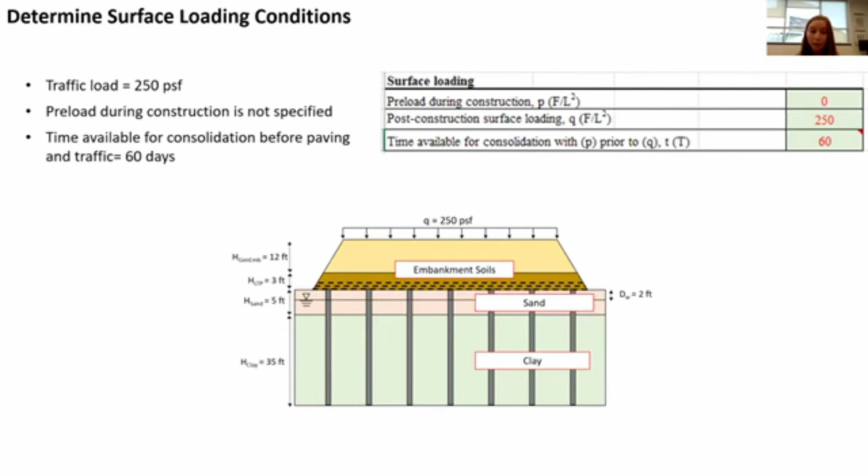Next, you'll input the column geometry. For this example, no pile caps were specified, so we'll just say none there. The columns are 2-foot diameter concrete columns, so we'll put in that they are round as well as the diameter, and we'll put in the relevant properties of those columns, which include the Young's modulus and the Poisson's ratio.

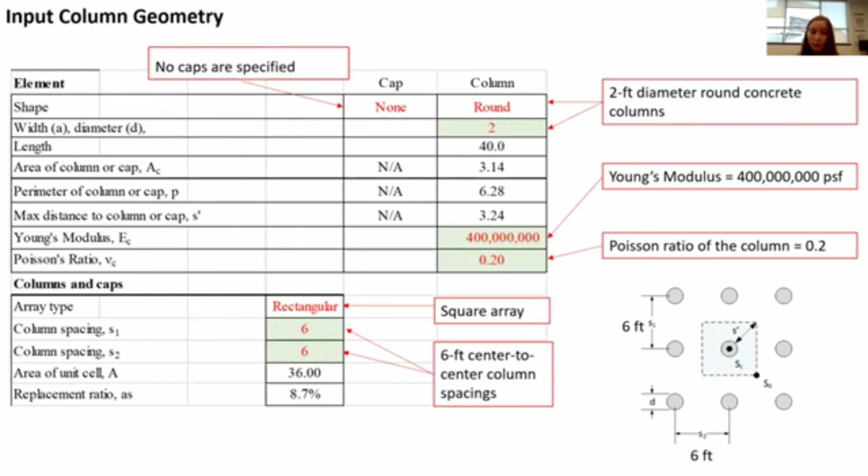Additionally, the array is square. This is a drop down again, so the options are triangular or rectangular, so you'll put in rectangular, as well as the center to center column spacings. Then you'll put in the reinforcement stiffness.

For this example, there are 3 layers of biaxial geosynthetic installed in the load transfer platform, and each layer has a long-term stiffness of 24,000 pounds per foot. So you'll go ahead and multiply 24,000 pounds per foot times the 3 layers, and you'll get a total stiffness of the geosynthetic of 72,000 pounds per foot in both axes.

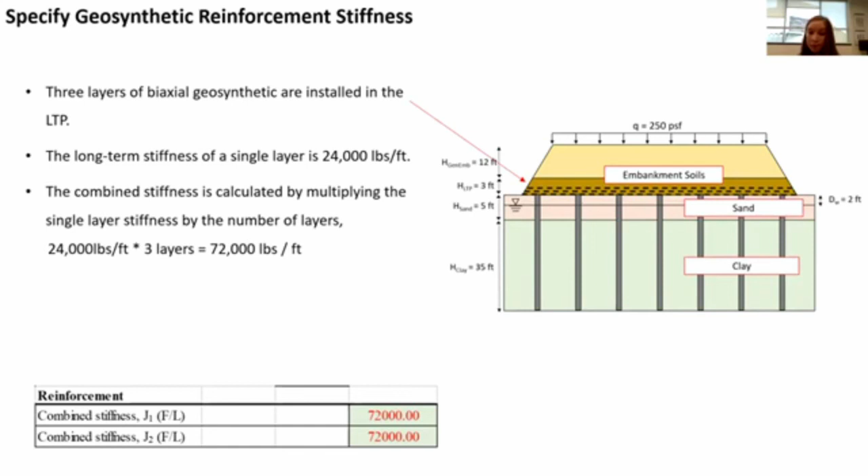And lastly, you'll specify the mobilization of arching model. The arching model selection is a dropdown, so you have the option of BAT or the simplified ground reaction curves. For this example, we selected the BAT model and input the relevant modulus of arching soil, as well as the relevant Poisson's ratio.

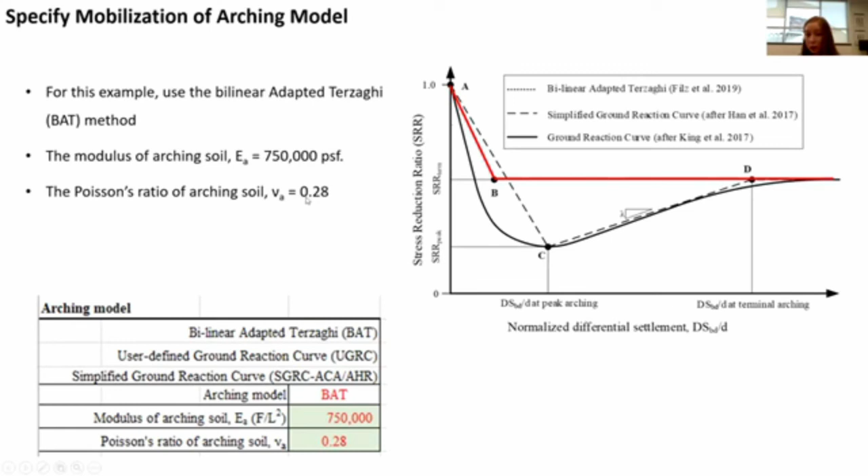After that, you are done inputting anything into GeogridBridge 3, so you'll go ahead and click the Solve GeogridBridge 3 button in the corner. For this example, on my machine, it took about 5 seconds to run, which is a significant time improvement relative to previous versions. It will vary based on the computer you're running it on, as well as the complexity of the example, but we found that 5 to 10 seconds seems to be pretty consistent for this type of model.

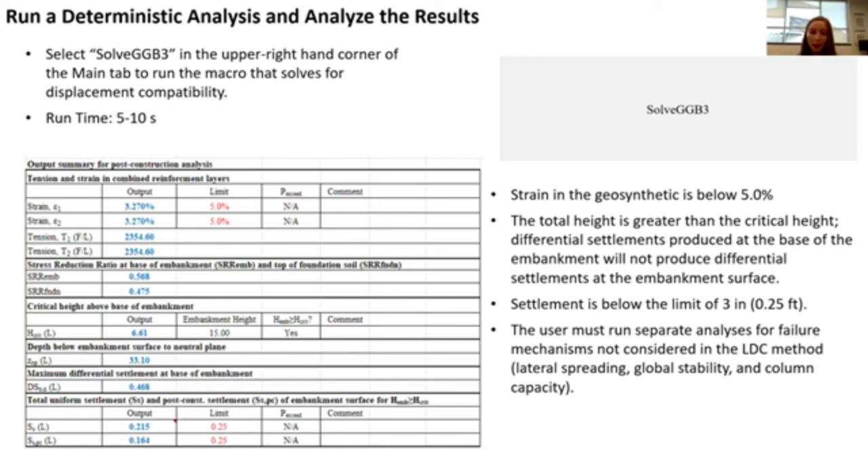In the outputs, you'll see that the strain in the geosynthetic is below 5%, which is good. Total height is greater than the critical height, which means we're not going to get that differential settlement at the embankment surface, which is also good. And the settlement for both the total and the post-construction settlement is below that limit of 3 inches or 0.25 feet. It's important to remember that the user has to run separate analyses for failure mechanisms that aren't considered by the LDC method, such as lateral spreading, global stability, and column capacity.

So you could be done there, but you could also run a probabilistic analysis, which is something that I'll talk about in a few slides.

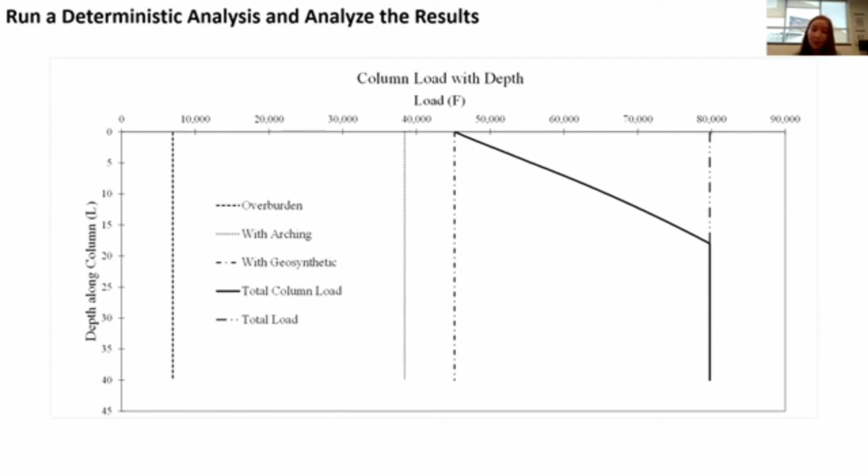This is one of the graphs that is automatically generated in GeogridBridge 3 that I think does a really good job of showing how the load is distributed through the different mechanisms. So this first section where you see O is the load, the percentage of the total load that is transferred directly through overburden. Next, you'll see that arching plays a pretty big role in the load transfer mechanism here. And the reinforcement plays a smaller but still pretty significant role in transferring the load. The downdrag or the negative skin friction also plays a very significant role, and you'll see that that varies with depth until you reach the neutral plane.

And before the neutral plane, you'll see that the subsoil itself is also taking a portion of that load. And no matter what the depth, the combination of all of these load transfer mechanisms will equal the weight of the embankment and the surcharge.

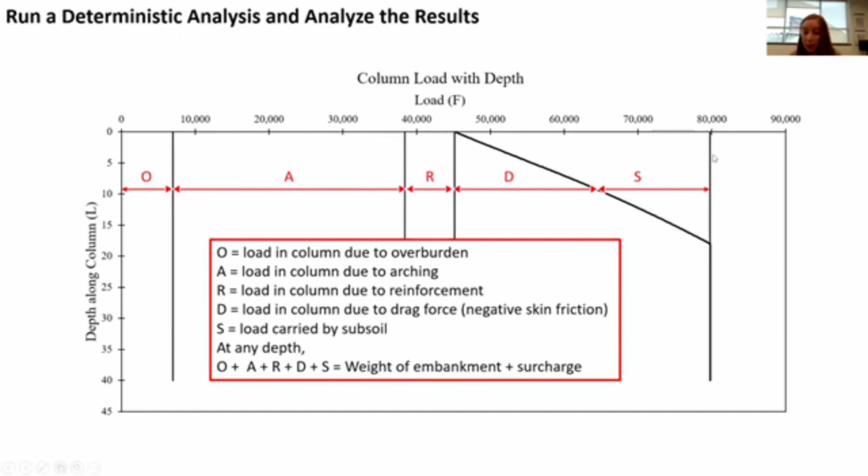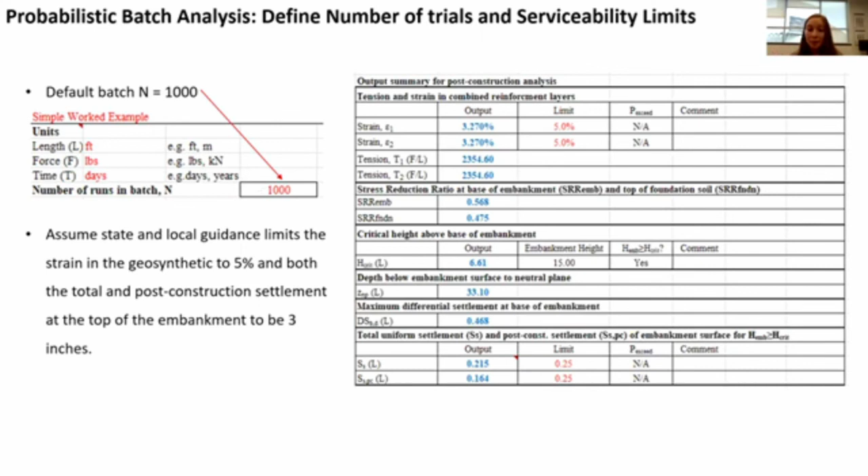So if you wish to run a probabilistic analysis, that is something that we're pretty excited about because it's a new capability that we have. In this example, we're going to run 1,000 trials, which is the number of trials that we recommend. And we're going to assume that the serviceability limits are the same that we mentioned previously.

The reason that this is important is because we know that soil parameters have a lot of variability and that there's a lot of uncertainty associated with them. So it's important to see how slight changes in that variability will affect the overall design results.

For this example, we're going to consider uncertainty in the unit weight, the earth pressure coefficient, the friction angle, the compression ratio, and the recompression ratio. We're going to assume a normal distribution for each of those parameters. GeogridBridge 3 allows for either a normal or a log normal distribution.

And we're going to assume that there is no covariance between these parameters. Currently, GeogridBridge 3 doesn't have the capability of considering covariance, something that we're considering adding, but as of right now, we assume that there is no covariance between parameters.

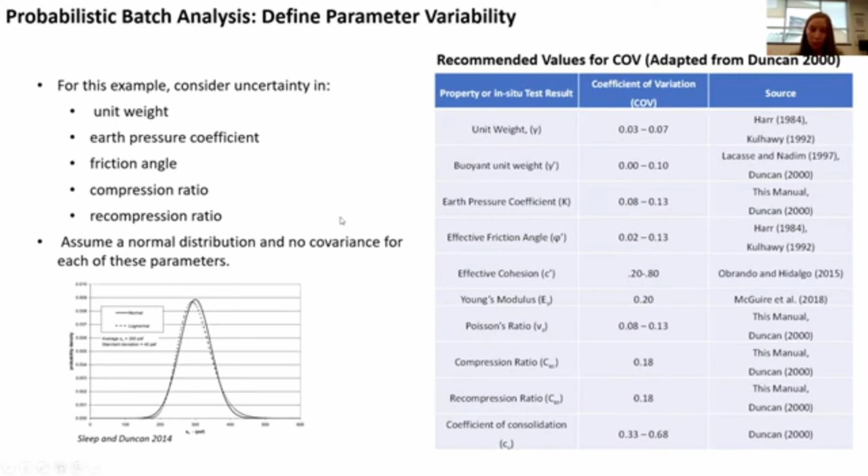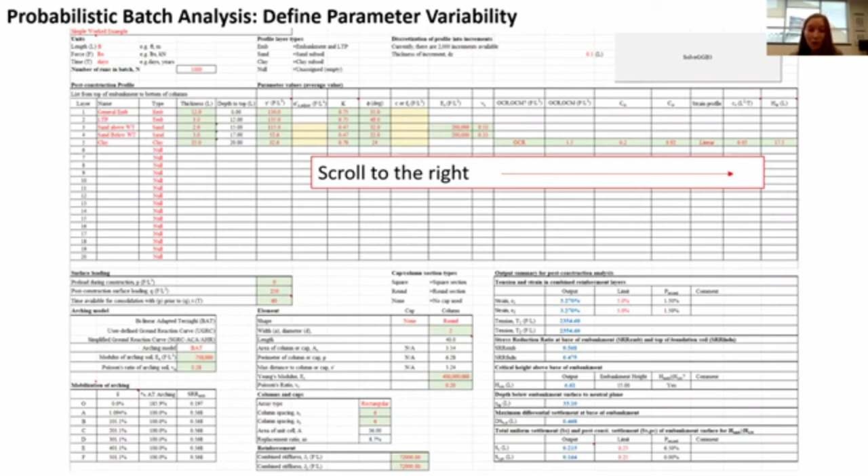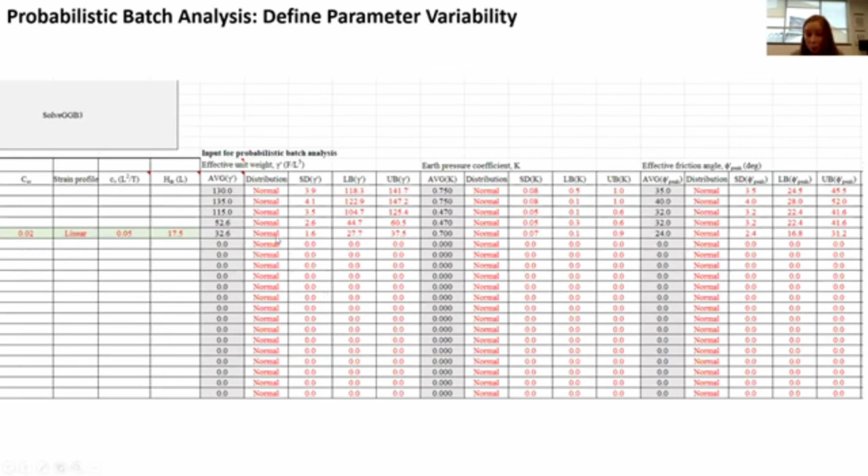So the input for the Monte Carlo simulation is actually directly to the right of where all of the deterministic analysis inputs are. And you'll see that it will use the average value of each parameter as the value that you input in the previous example. It'll allow you to prescribe a distribution based on the soil layer, and it requires a standard deviation as well as an upper and lower bound.

So I'm only going to show you the unit weight, but the process is the same for all of these different parameters. We're going to assume a coefficient of variation of five percent for the layers below the water table, and then we're going to define the standard deviation as the average value times that coefficient of variation. So 0.03 times 130 is going to give you 3.9, etc. The upper and lower bounds are defined in this example by the 3 standard deviations.